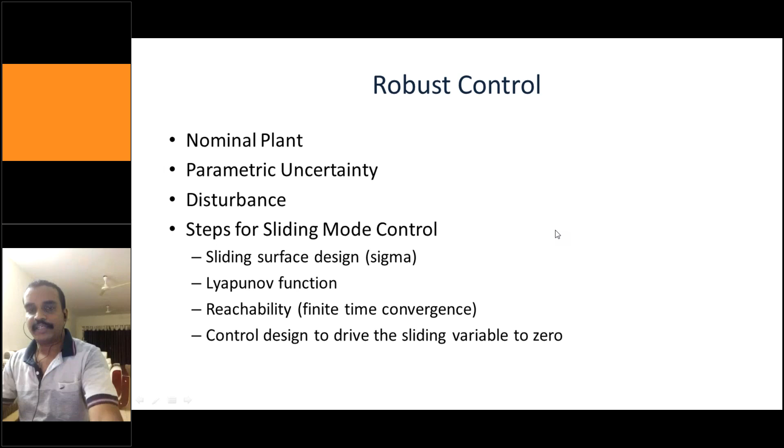So we will ask ourselves the fundamental question why variable structure control is required, because sliding mode control is one such technique in variable structure control. If you have heard of the bang-bang controller, these all come under the similar category. So for variable structure control, we'll start our discussion with a simple linear system, which is called a double integrator plant. That means two integrators connected in series, one integrator is 1 by s, the other is 1 by s. If you connect those two in cascade, the corresponding system we call 1 by s square, or the double integrator plant.

Why is this plant very important?

Excuse me, sir. Yeah, Patnaik? This resound. Yeah. Resound means somebody is not on mute. That's why the resound is coming. Is it okay now, Patnaik? Yes, sir. Okay, but if any one of you is not on mute, it will create the resound and it will be a disturbance to everyone. So that's why I am asking everyone to please be on mute.

Okay. So why is this double integrator so important for practical applications or any control system design? The beauty of this double integrator, if you see, 1 by s square: there are two poles at the origin. That means the system is an unstable system.

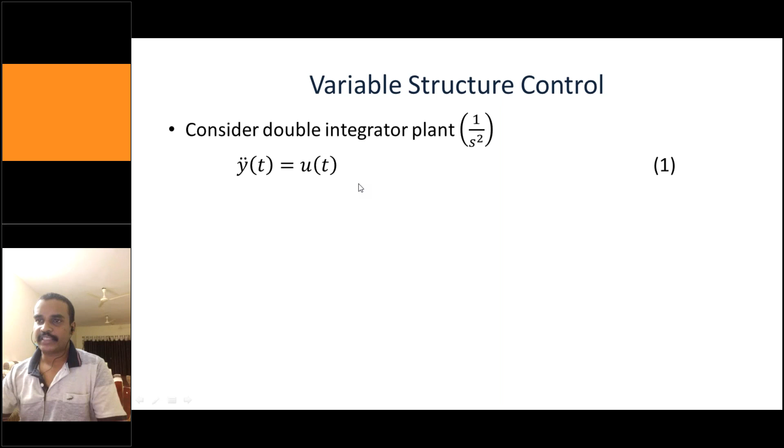Is my voice clear? Can you please type in the chat box? Some resound is coming, sir. Patnaik, is it? I think only for you. For others, Dandis, Sirisha, Kusma, I think it is fine. I think Patnaik, this is a problem from your side.

Please rectify it. Okay. So the initial feedback control law. Sir, please put it on mute. Satish Naidu. Yeah. Half of my time is going.

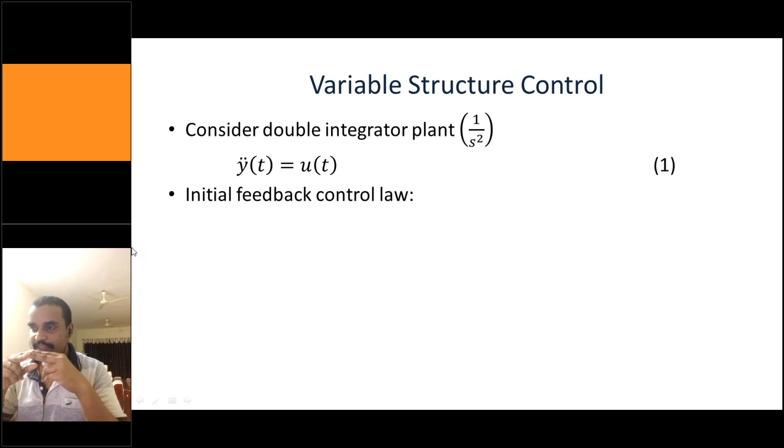Okay, so I will start with the linear initial feedback control law. The two such feedback control laws we have discussed in earlier lectures are the pole placement controller and the LQR controller. You can design using any of these methods, either pole placement or LQR.

U equal to minus kx, that's what we have seen. If you see this double integrator, there are two states. So my control law, I can write it as the feedback law. This is not exactly the state feedback law, this is the feedback law: u of t equal to minus k into x.

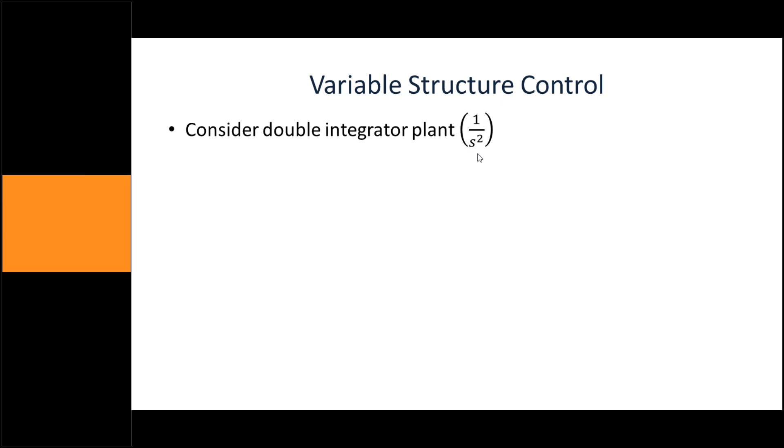Okay, so consider the double integrator plant 1 by s square, and this is linear. This is the structure: y double dot equal to u of t. Why do we say it is a linear double integrator? Because if I take the Laplace transform on both sides with zero initial condition, this will become s square into y of s equal to u of s. If I bring s square to the other side, that will become 1 by s square.

So the initial feedback control law I'm going to show you here is u equal to minus k into y. This is the piece, and we will see that this is not sufficient to...

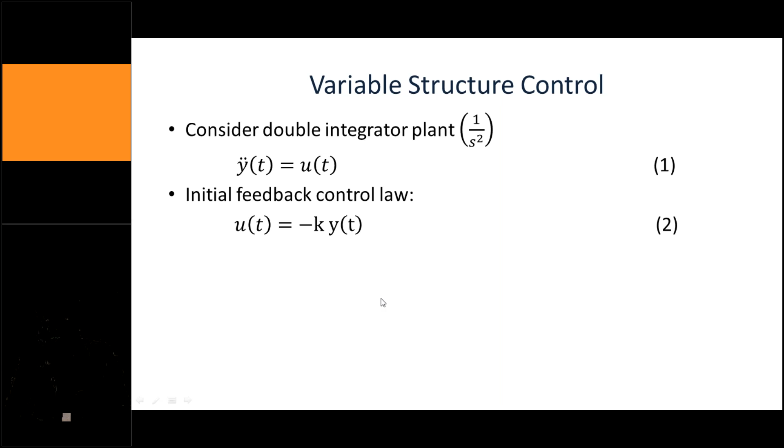We'll assume that k is strictly positive for stability. If k is negative, then u of t will become k into y, which means you'll be placing the pole on the right half of the S plane, which is not required. So for the left half of the S plane, ensure that k is strictly positive.

By pre-multiplying equation 1 and rearranging, we get y dot square plus ky square equal to c. This is quite straightforward. You can do it on your own. Just pre-multiply, and if you rearrange, you'll be getting this.

What are the properties of this? This is quite familiar if you consider k equal to 1, it represents the equation of a circle with the radius square root of c. If I assume k equal to 1 and then change this k value, the circle might change to an ellipse, and so on.

So for various values of k, we'll get different responses. We'll be considering two cases. In one case, we'll keep k in between 0 and 1. And in another case, we'll take k greater than 1. So two different cases, and we'll see what is going to happen.

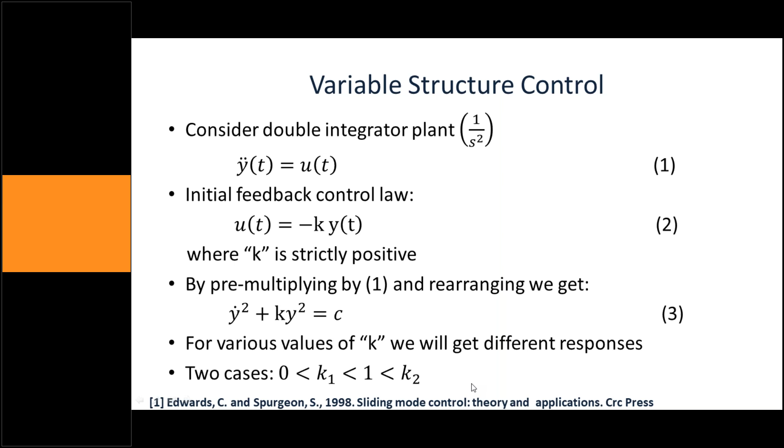I will repeat this for a minute. This is a double integrator plant, and u of t equal to minus ky of t is my initial feedback controller. If I rearrange, I'll be getting the equation of a circle with square root of c as the radius of the circle. For various k values, we'll be getting different responses. So this is one such thing.

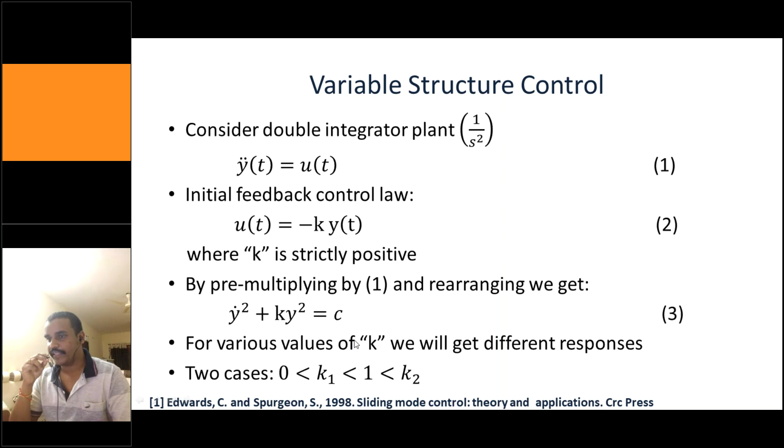The first and second case are with the linear control law. In the first case, we are going to use k1 for the value of k between 0 and 1. In the second case, we are going to use the same control law with k2 greater than 1. In the third case, we are going to use what is called a variable structure controller. The structure of the control itself changes based upon y into y dot.

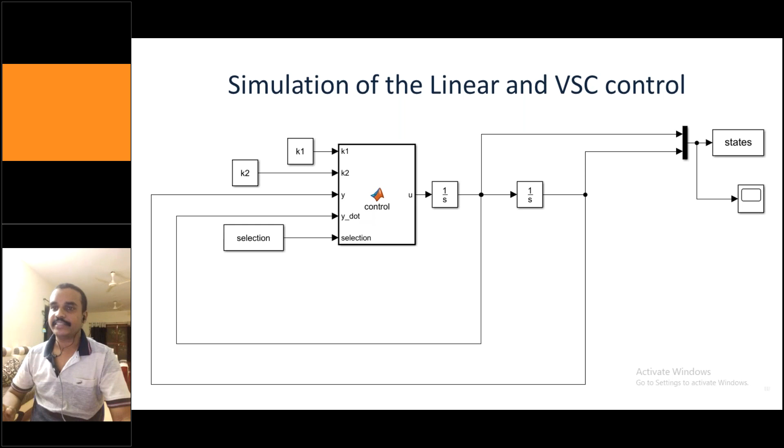The first case is if you are using a very old version of MATLAB, then you have to replace this SLX with MDL files. I'll be giving you the MDL files as well. So just type MDL here and MDL here. If you're using the newer version, you type SLX, or otherwise the old MDL file can run in your newer MATLAB versions as well.

The second thing is, if this prompt doesn't work, just comment out this prompt, remove this input prompt, and you can just type 1 here, 2 here, 3 here. So if you run this code in the normal case, it will prompt you to enter 1. If you're entering 1, it will directly give you the plots. So this is the second part of the code. What you have to do is append this figure here in the bottom, so it will look like a very big code. You have to append this figure.

So if you run this parameter code, automatically you will get all the results based upon selecting 1, 2, and 3. So now I will give you the skeleton code. How the skeleton code will look like, I will show you now, and you have to do that one. But how to run this one, I am going to show. So I am running the SMC code for the double integrator.

The first thing is you have to create a parameter file. So this is the parameter file. Whatever code I have given there, you just copy and paste, create one new M file, copy and save with whatever name you want. But don't save with characters which MATLAB won't allow you to save.

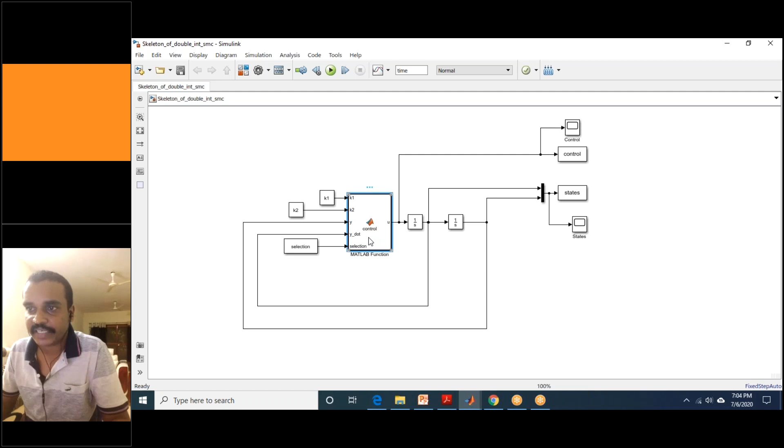You can see that this fill is the one. So in this fill, you have to copy and paste the control code that I'm going to give you now. So this is the parameter code, and this is the control block code. And I'll be giving you 15 minutes at 7:20. I'll be sending you this in a minute. So I'll be giving you 15 minutes. So please develop the code. Just copy and paste, nothing more.

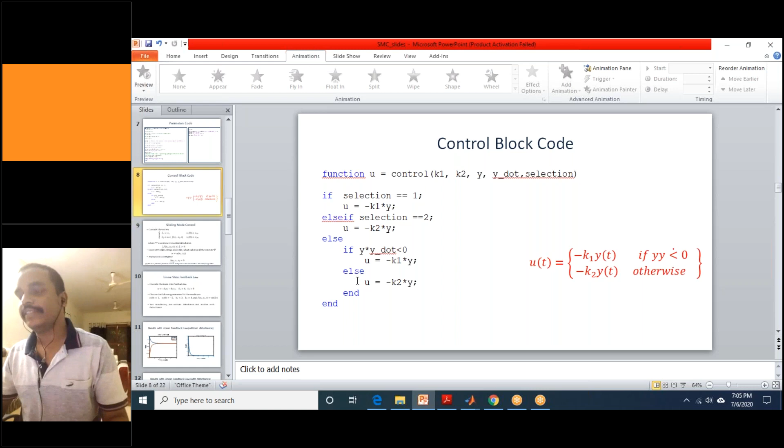Since you already have some expertise, I've already sent you the revision of FDP 1.0, and on the second, and yesterday also you might have done something. So just copy this control block code into that one and see whether you are getting the results or not. As soon as you get the result, please post in the chat box or the WhatsApp chat that you got the result. So I'll give you 15 minutes to do this tiny task, and that's it from my side. I will be sending the files in a couple of minutes to you.

You will receive them in another couple of minutes. The password will be the same for all my PDF files. Bharani GMRIT is the one. So I'm just converting the code for the 2011 version so that it will be helpful for you.

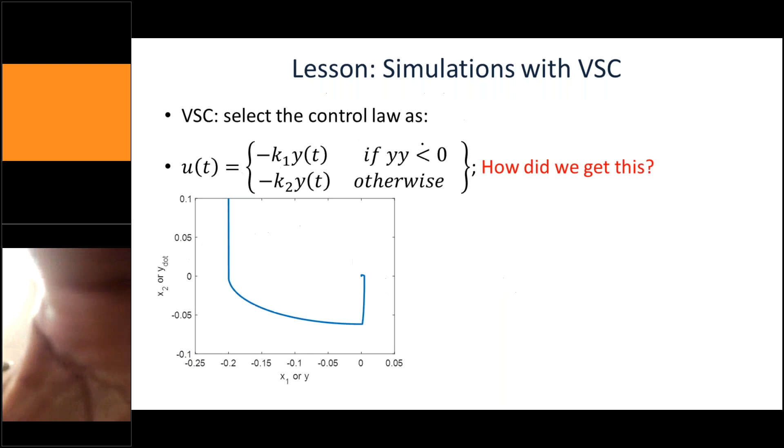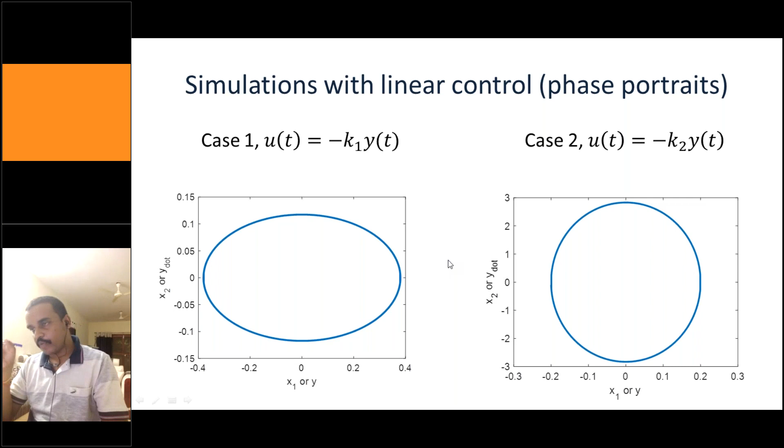So the good thing about this is, individually, from the initial condition, neither is going to the origin. When I combine both of them together, you can see that it is going to the origin. From any initial condition, you can drive it to the origin. You can check with different initial conditions and see whether you are getting the same response or not. That is not the case with the linear feedback controller. So this is the variable structure.

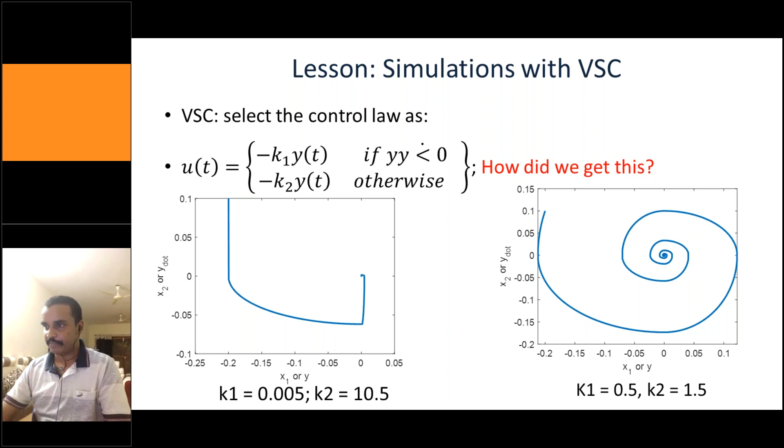This is one classical example which you will see from various sliding mode experts. Christopher Edwards is an author of both texts, and fortunately I worked with him for 4 years when I was in the UK doing my postdoc, and during my PhD he was also my team member. So I was fortunate to work with him, and whatever I learned from him, I am trying to pass on to all of you so that it will be helpful.

Okay. So now we will go to the crux of the sliding mode controller. Please listen to this very carefully. If you know this fundamental very well, then I can guarantee you can replicate the same thing for very complex systems as well. Consider the system x1 dot equals x2 and x2 dot equals u plus f(x1, x2, t).

The main difference between this system and the system we discussed earlier is, and the cursor is not visible, yeah, you can see that this f is the additional disturbance, whereas earlier we had initial conditions like 0.1 and minus 0.2. U is the controller. This looks the same as the earlier problem. The only difference is this f(x1, x2, t).

So this is an unknown disturbance which you don't know, and we will see how your sliding mode control design will have impact to suppress this disturbance. The only thing you should know while designing the sliding mode controller is the magnitude, or the bound, of the unknown bounded disturbance. So the maximum value of this f should be known to you a priori.

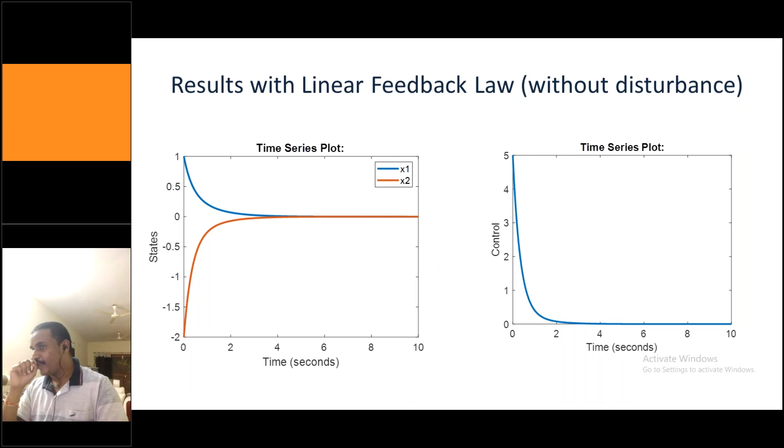So what is the lesson? What we can learn from this one is that your nominal linear control law has a capability to deal with nominal systems, without disturbances. As soon as you see the disturbance, the good results we have seen without disturbance are lost. So this motivates us to go to the sliding mode control design.

So what is a sliding mode control? These are some of the preliminary things I'll be discussing with you. Consider the desired compensated system. Again, I'll be discussing the same system: x1 dot equal to x2 and x2 dot equal to u plus f of x1, x2, t. So consider the desired compensated system.

This is my desired system dynamics. Obviously this is x1 dot equal to x2, what we have seen there. So inherently it has captured both the x1 and x2 dynamics here. Plus c into x1. As long as this c is positive, if this goes to the other side, it will become minus c into x1. That will always ensure that x1 will have the pole on the left half of the plane.

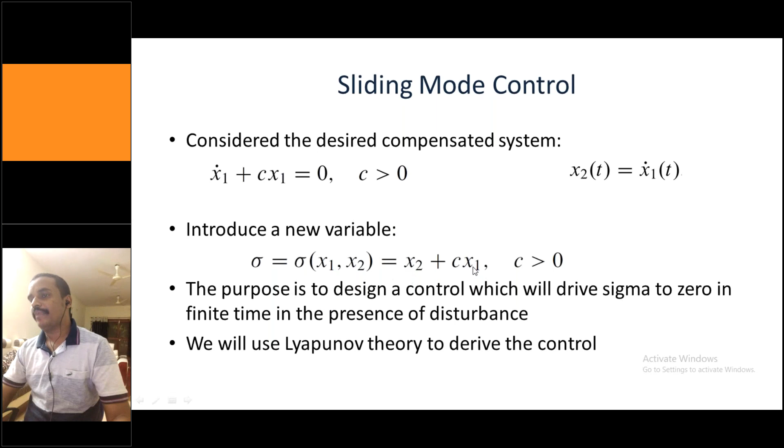Again, if you see here, what is sigma dot? Sigma is defined here like this. If I take the derivative of this sigma, sigma dot is nothing but x2 dot plus c into x1 dot. Remember this - if I take the derivative, x2 dot plus c into x1 dot, c is constant, and x1 dot is nothing but x2. So that's what's going to happen: c into x2. And again, if I substitute the x2 dot formula, which is nothing but u plus f, it will look like this. You have to take pen and paper and do it manually, then only you will get the feel of this.

Now I am assuming that my u - this u is in my control. What I'm going to assume is u equal to minus c into x plus v. And if I substitute this u here, then I'll get V dot something like this: sigma into f of x - sorry, this should be x2. The x2 terms will get cancelled, and this v will be here.

Now the purpose is, how should I select this v? If I select v equal to minus rho into sigma, sine of sigma - or this is the signum function of sigma. Where am I getting sigma from? We have seen the equation, and this rho should satisfy this relation. What is this L? L is the bound on the uncertain bounds. This L, as I told, should be known to us, and this alpha is the finite time convergence parameter. So L should be known a priori, and alpha can be a tunable parameter. Based upon this alpha, you can find out the rate of convergence, the convergence rate. And this root 2 is coming from that particular aspect only.

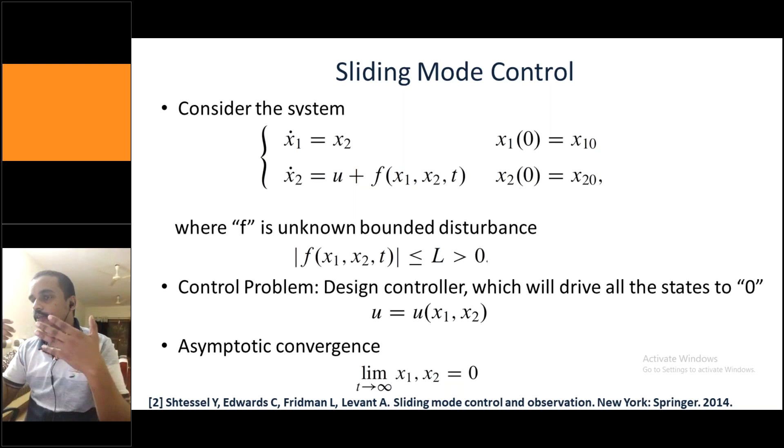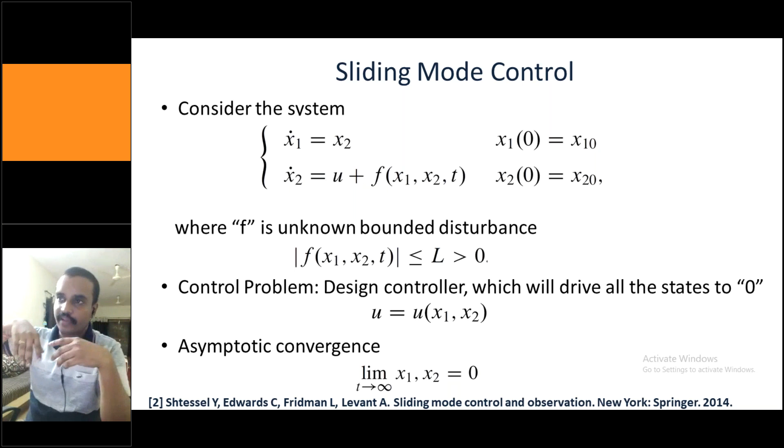If it is current, suppose you are operating some boost converter, the two states are voltage and current. If the output current in the nominal case is 1 amp, due to some external parameters and disturbance acting on your system, the current can maximum go to 1.5 or so. So the maximum value you should know, that L tells about the bound. That is the physical implication.

So this V is generally, if you see, my sliding mode control is a combination of linear as well as nonlinear. This V is a nonlinear term, and this particular term is a linear control law. So this is a combination of linear as well as nonlinear.

And this minus rho into sigma, sine of sigma, this is the signum function. This rho can be given by L, what I discussed, and alpha is the convergence state, the finite convergence state we have seen here. This alpha is coming from here. So L should be known a priori, and alpha is a tunable parameter.

So now one can ask, what is the sine or signum function? The sine or signum function will look something like this. Let us assume x is my time, or some variable. If x is less than 0, my output will be -1. When x is greater than 0, my output will be 1. And when x equals 0, my output is 0.

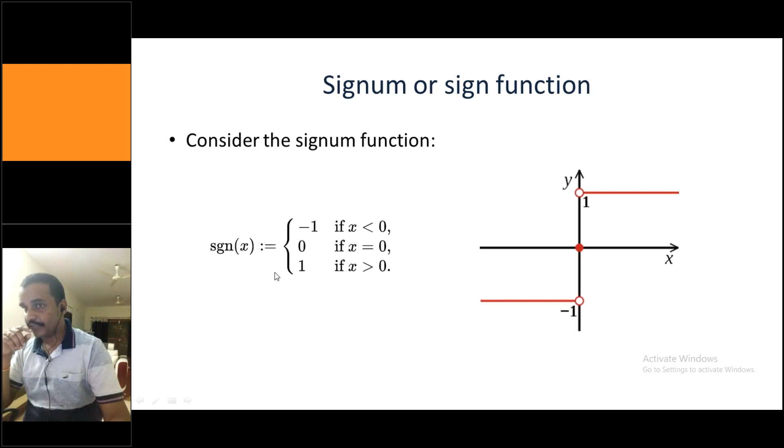So you can see that for the positive values of x, the y is always positive. And for the negative values of x, when x is less than 0, it is -1. And when x equals 0, it is 0. So this is called the signum function, and the MATLAB command sign of x will give you the signum function.

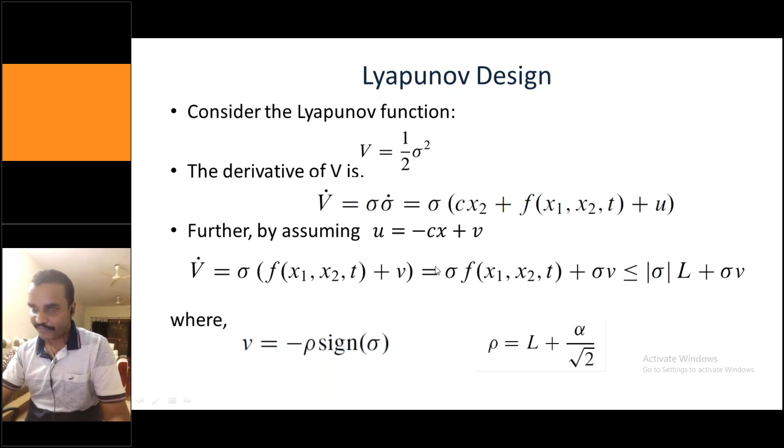So this tells about the sliding mode control law. So this V is my sliding mode control law. Now I will formally define the definitions of the sliding mode variables. So this is the sliding mode controller, forgive me for this typo here, the x2 should come.

So that's what you can see, that u equals minus c into x2 minus rho into this one. This sliding variable, what we have discussed till now in sliding mode literature, is called the sliding variable, and this sigma is called the sliding surface, or sliding manifold sometimes. Sometimes the sliding manifolds can be multi-dimensional as well, instead of sigma you can have surfaces.

The sliding surface, sigma, can be a vector as well. The condition we call sigma into sigma dot is the reachability condition. For the reachability condition, this should satisfy: minus alpha by root 2 into modulus of sigma. So that is called the reachability condition, and this is the final control law.

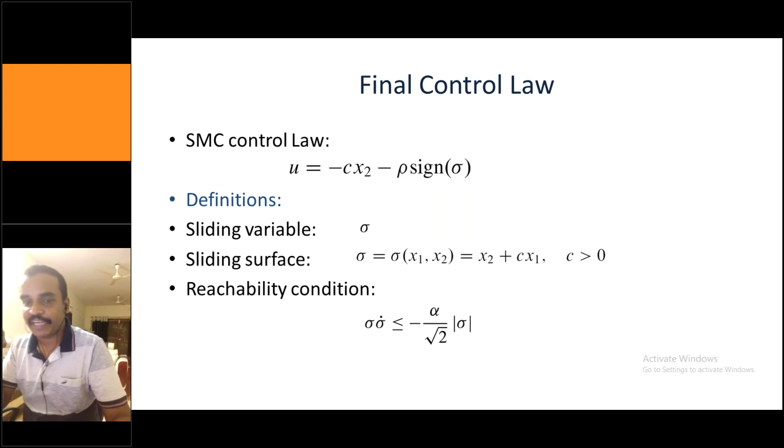Now I am going to implement this final control law using the linear feedback method and the nonlinear method, and then I will see how my response will look like. So this is the block diagram, this is the simulation diagram.

Again, I will be giving you the skeleton. The first thing is, what is this plant. Only two things you should know: this is the plant and this is the control law. And I have kept a switch here for switching action. If I want to see the response with respect to disturbance, I will activate the switch. If I want to keep the switch at 0,

Sir, can you please zoom a little bit, sir? Zoom a little bit, okay. Yeah, sir, thank you sir. Okay.

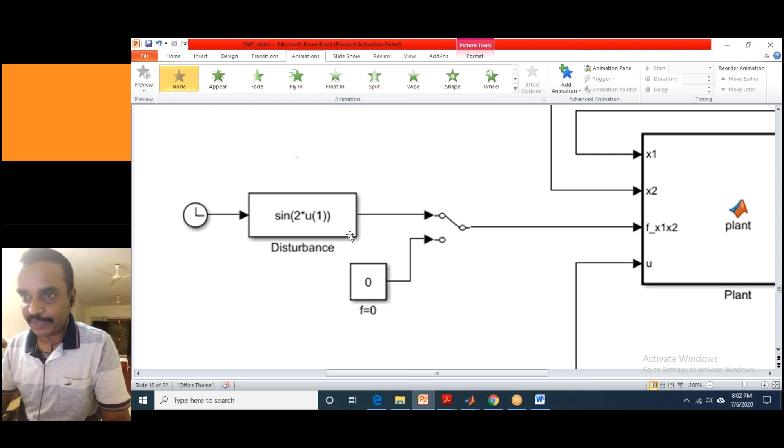You can see there is a switch here. This is a manual switch, I have not written any fancy coding. If I want to see the response with respect to the disturbance, I will activate this switch. If I want to activate to 0, if you double click, your switch will be activated. So this is to see your response in the presence of disturbance or the absence of disturbance.

So the next thing is, this is the plant. Four inputs, two are the states, one is the disturbance, and the other one is the control law. This is again my second order system. I will show you what is inside this plant and other things. And this is my control law.

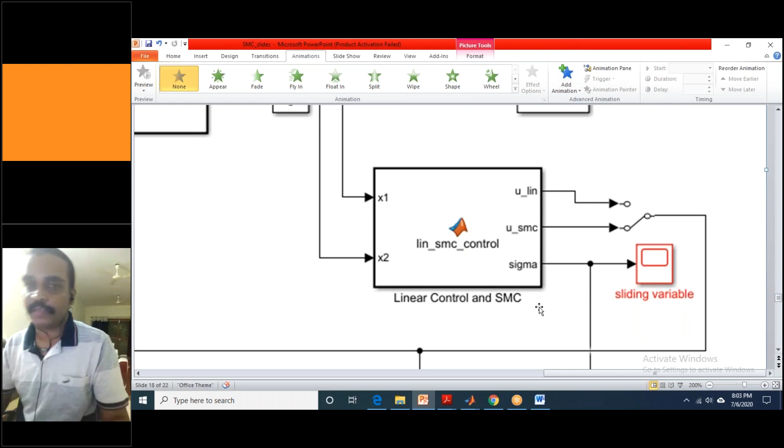I have written a single MATLAB code, a single Simulink file. This is one way of doing the coding. There are hundreds of ways, or there may be a better way of writing the code itself, but I feel that for you, this is the simplest way to do the coding.

And here there is one more switch. There are two control laws going: the linear control law and the sliding mode control law. If you want to see your response with respect to the linear control law, double click this one and it will be connected to the linear control law. If you want to see the response with respect to the sliding mode controller, double click, and the sliding mode controller will be activated.

So this is oh, something has happened, okay.

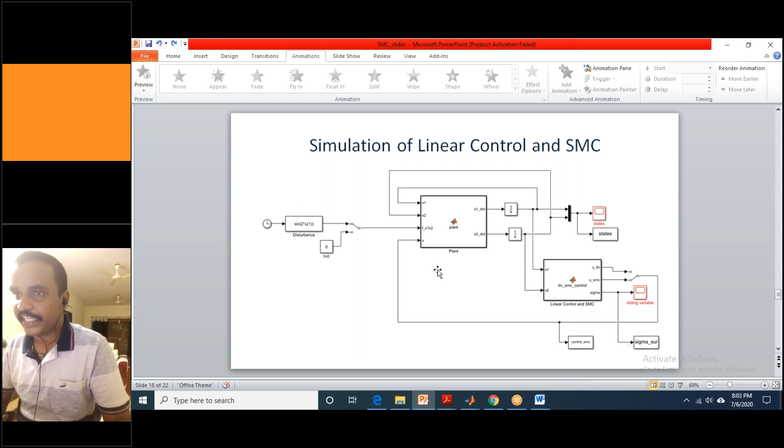So this is basically the simulation of linear controllers. I think this block diagram is quite clear. Now I will show you what is inside this. Let me go to full screen mode.

What will be inside this, how to do the coding. If you see the plant block, we have seen 4 different inputs: one is x1, next one is x2, then the disturbance, and u. And this is the standard. If you see, these are the equations: x1 dot equal to x2, and x2 dot equal to this. Don't type this complex equation in the plant block, this is just for your understanding. I have typed it here so what you have to do is just copy and paste the 3 lines.

This is for your understanding: x1 dot equal to x2, and x2 dot equal to u plus function. So this x1 dot, I have represented as x1 underscore dot, which is x2. X2 dot equal to u plus f underscore x1 x2. That is the way to write the code, you can write it in any way, this is just one such way. So this is my plant block, and the plant is very much clear.

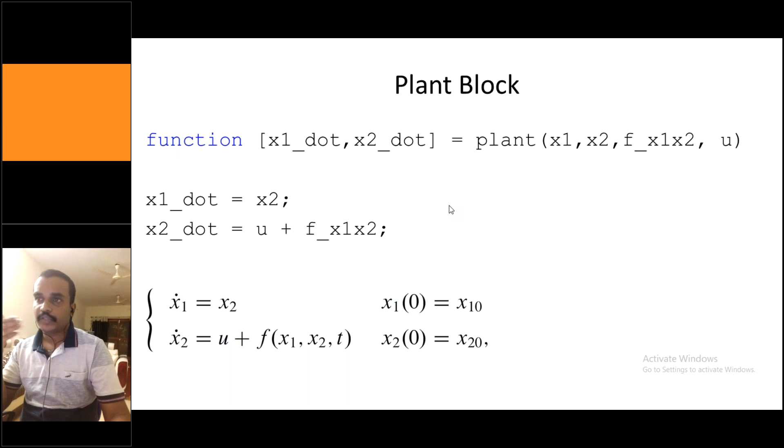Now I will go to the control block and explain how to write the controller. The important thing to see here is there are 2 different inputs and 3 different outputs. For designing the controller, I need 2 different inputs, x1 and x2.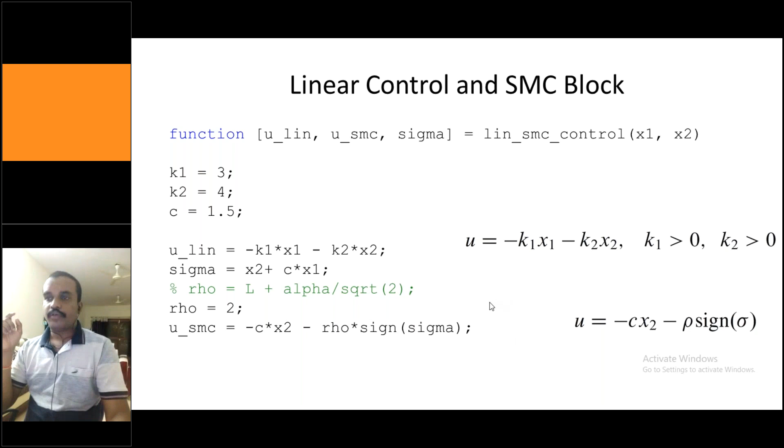And this is my sliding mode control, u equal to minus c into x2 minus rho into sign of sigma. So that's it, minus c into x2 minus rho into sign of sigma. So this is the way to write the linear SMC code as well.

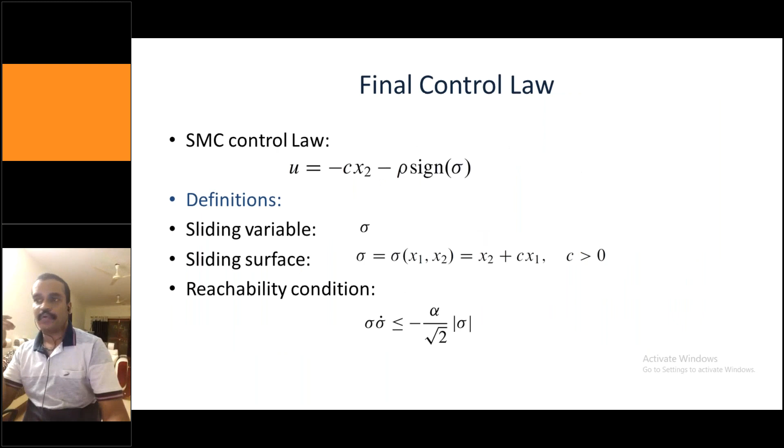And how to avoid the chattering? There are many ways to avoid the chattering. One such way is by using the higher order sliding mode control law. Another way is to approximate the sign function with a sigmoid function. There are another 4 or 5 ways which are beyond the scope of this presentation.

Sir, sorry, you are telling that chattering is high frequency. What is the range of that frequency, in kilohertz or megahertz? Is it just the clock frequency? Sir, please listen.

That depends upon the kind of control you are designing. In general, for practical systems, for any aerospace system or any power system, that depends upon the switching frequency of the whole system you are using. That depends upon the switching frequency of your IGBTs, if you are operating with IGBTs or any power electronic devices.

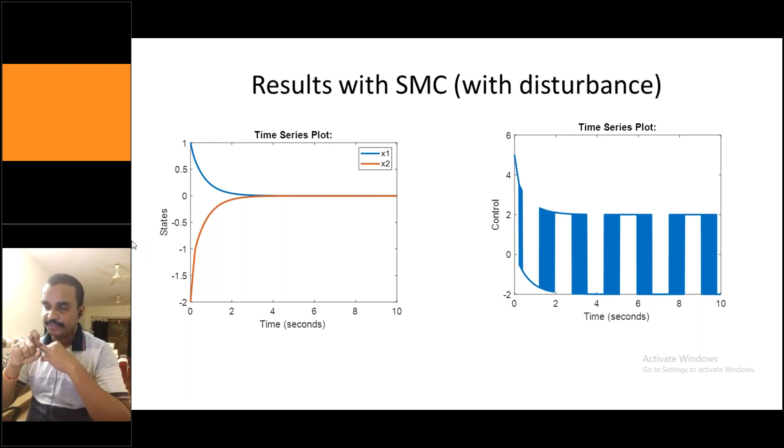So you have to run 4 different cases. One, activate the linear controller. In the first case, assume that the disturbance is 0. In the second case, assume that the sinusoid disturbance is activated. Then go with the SMC and repeat the 2 cases, one without disturbance and the other one with disturbance.

So now what I'm going to do here is show you the simulation. These simulations I have written in a bit different way compared to the previous one, just to give you the flavor of 2 different ways of coding things. First of all, here there are no parameter files. There will be one plotting file, which I will give you. This plot file you have to use once you run the simulation.

Okay, so I'll be opening the simulation file. I will give you the skeleton one. If I double click, since this is the skeleton file, you don't have the x1 dot and x2 dot. This you have to fill. And the other one is the control file I'll be giving you. This is empty. Here you have to type whatever code I have given to you.

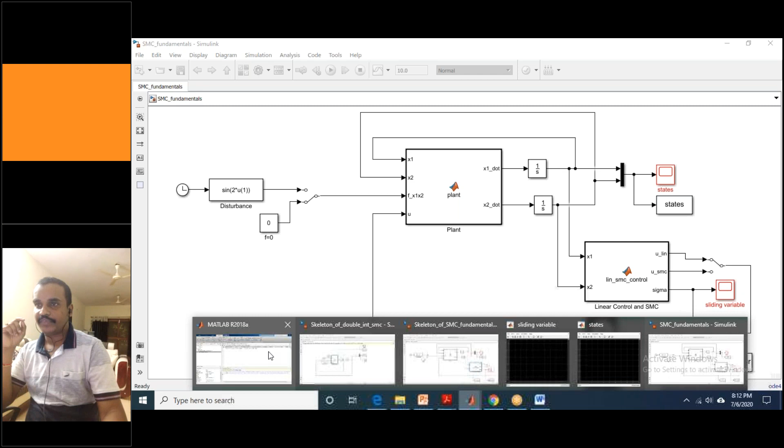For the 4 cases, in the first case I have activated, you can see here, the ulin, and the 0 disturbance has been activated. That means I'm going to see the response when there is no disturbance and my control input is linear. If I simply run this, it will run if everything is fine, otherwise an error will pop out. Once the simulation is done, I will run this plots code, and this will give you two different things.

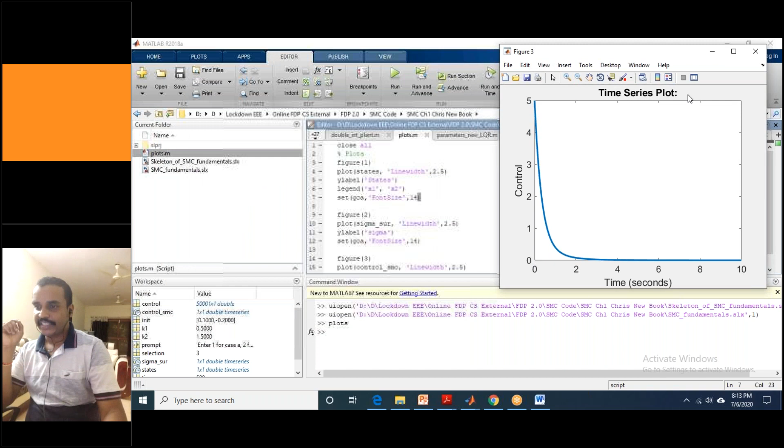So you can see here, these are the states going to 0, this is the control law, and another one is the sliding surface. As far as the linear case is concerned, there is no sliding surface required. Okay, so this is one such case. In the second case, I'm going to activate the disturbance. I will just double click this one. It has been activated. Now I'm going to run this one.

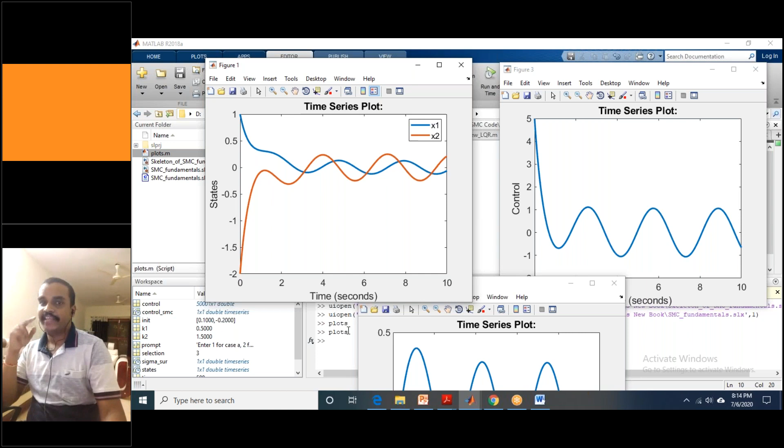Now again, I will go to the plot and plot this one. This is the sliding surface, sigma, which is not required. This is the control signal. What you can see here is my nominal controller couldn't drive my states to 0. So two sets of simulation we have done with the linear controller activated, one with 0 disturbance and another with sinusoid disturbance.

Now I'm going to operate the sliding mode control here. Sliding mode control has been activated; you can see I'm double clicking this one. Now the sliding mode control with 0 disturbance. I ran this one. You can see that it is running. Don't rush to run this one. Once it is completed, come back here and run the plots.

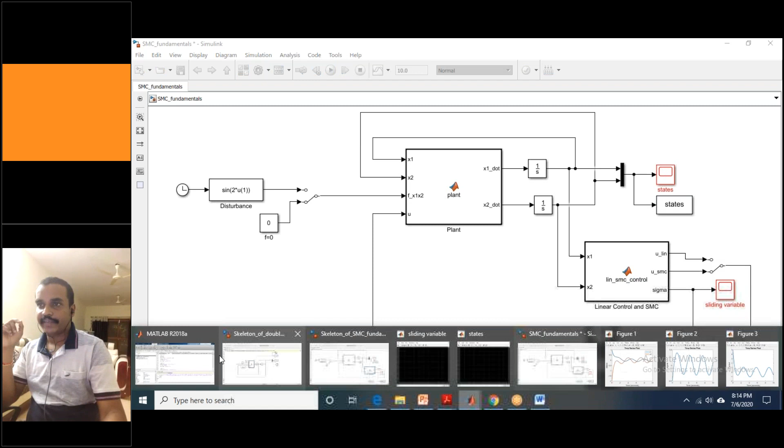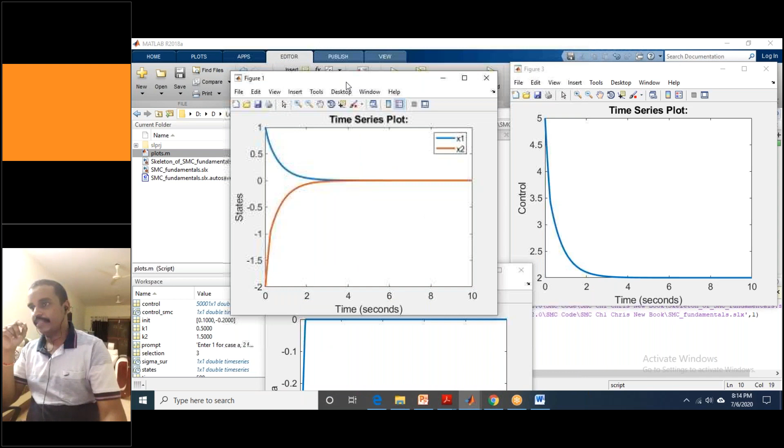You can see that without disturbance, this is the sliding mode, and it is acting like this. This is the sigma. From some initial condition, it is going to 0. This is called the reaching phase. In the sigma, you can see that up to this point there is a small jerk. Why is this happening? Because my sigma has reached 0 at this particular time, and after that it is perfectly fine. We will see the same thing for the nonlinear case as well.

This is called the reaching phase. The other one is called the sliding phase. You can see that the sigma has gone to 0 and the corresponding state has gone here, and then it has gone to 0. Now let's see the beauty of sliding mode control. I'm activating this one by double clicking. Now sliding mode is activated and the disturbance is activated. I'm going to run this one.

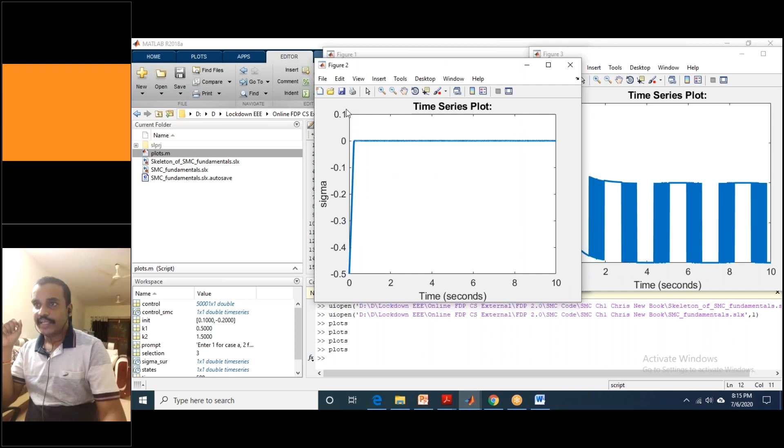And now I will run these plots. So this is the surface, and you can see that all the states have gone to 0. However, continuous chattering, this is required. So-called chattered control input is required. And this is the sliding surface, sigma.

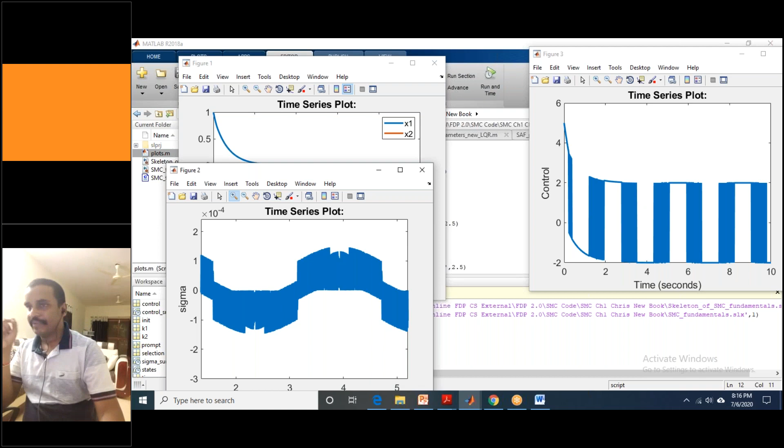If I zoom this one, you can see that the sliding surface has not exactly gone to 0. What you can see is it's on the order of 10 to the power of -4, which is quite reasonable. And if you want further reduction of this sliding surface chattering, which in turn will have impact here, there will be a trade-off. So you have to select various values of rhos and various values of alpha, what we have seen. If you keep on changing various values of rhos and alpha, then this control chattering effect can be reduced.

So that is a parametric variation study of the control parameters. If you keep on changing them, it will change the magnitude and sometimes the frequency. This frequency can be controlled by using higher order sliding mode or approximation of the signum function. So this is what you have to do.

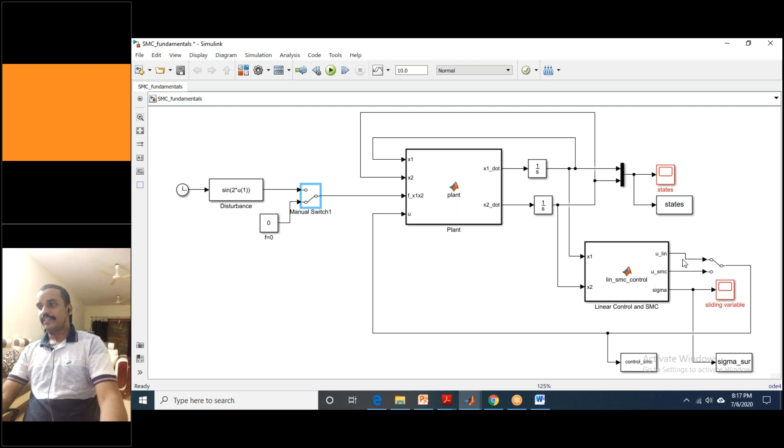Again, I'm repeating, you have to do 4 different simulations. In the first simulation, activate this linear control law and activate this 0 disturbance. Run this one and see whatever results you get. In the second case, keep this linear control law and see the response with respect to the disturbance. Then activate the sliding mode control law without disturbance, and then activate it with disturbance. Run this, and you can see the response. You can then go for the plotting side.

So I will be sending you, in the same format, 3 different files. This time I will lock the PDF. So one Simulink file, one plot file. First of all, you have to run the Simulink file and then you have to run the plot file, otherwise it's not going to work. So the Simulink skeleton file in both formats, the plotting file, and the third one is the PDF file.

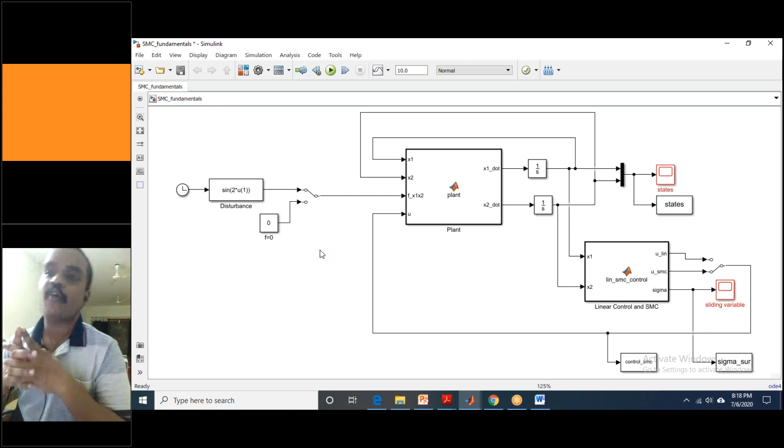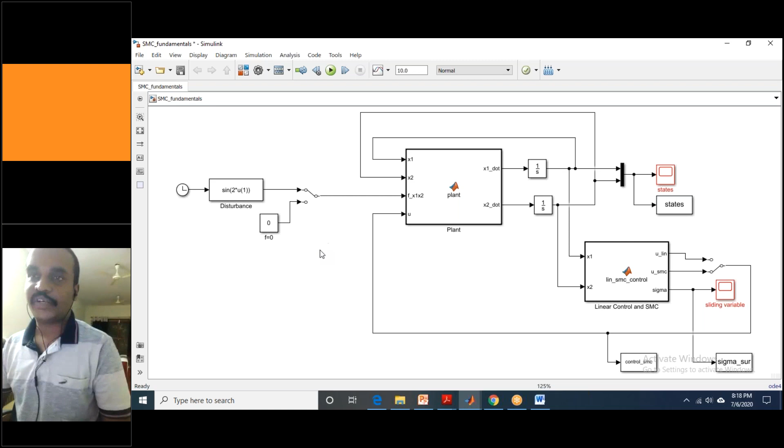And actually, some healthy discussion is going on with me. Several participants have some disagreement with me in some aspects. Some participants who are from a power systems background are very hesitant to learn this power electronics, so they were saying that this example is not clear to them, whereas vice versa, the participants who are working in power electronics are not interested.

Hello, sir, myself Dr. Ponda. I am from power systems, but I have read a little bit of control systems in my BTech. So one question: should I ask some questions to you now? Sir, please let me complete my talk. I will give the slides to the participants. They will keep on working, and during that time we can have the discussion, so that it will not bother the other participants. Just give me 5 minutes, sir. Okay, thank you.

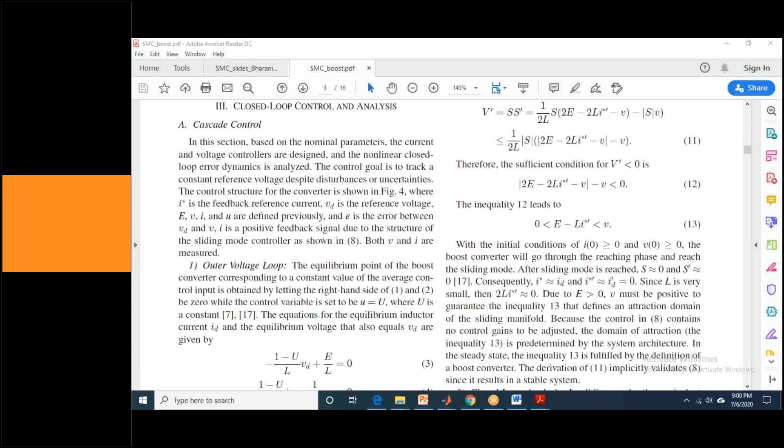Yeah. So let's share my screen. Okay, I have shared my screen to all of you. I think it should be visible. Let me see whether it is visible to you or not. Yeah, okay, good.

Today I will tell you the fundamental aspects of this paper and how to do the simulation. There is another extension of this paper. Here he has used the non-minimum phase boost converter. In another paper, an author has applied the similar concept to the Cuk converter. So let's have a discussion on this one.

The paper here is closed loop analysis and cascade control of a non-minimum phase boost converter, published in IEEE Transactions on Power Electronics, volume 26, number 4, April 2011. I will not go much into the electrical point of view. I assume that if you want to boost the input voltage, you can use a boost converter. What I'm interested in is that there are two states of this boost converter, i dot and v dot, and the remaining things, what E and L are, you can see from this paper.

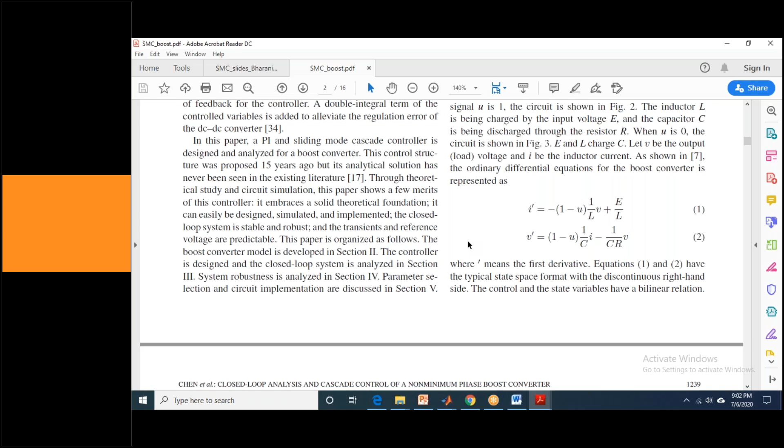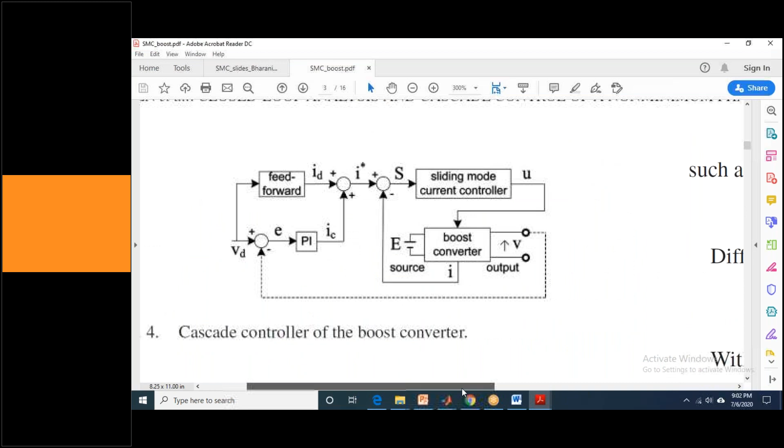So if you see this particular diagram, what I can say here is basically it is a two loop structure plant. So here you can see that the inner loop is a sliding mode controller, which is basically a current controller. And the outer loop, you can see that there is a PI controller, and in fact they have added the feed forward control as well.

So in some cases, if this feedback control doesn't work, in the absence of uncertainty, if you know your system exactly and everything exactly, then in some cases this feed forward control will work. So this is the overall structure. This is the boost converter. Two states, the current and the output voltage, and the input U from the sliding mode controller is going here. So what are the things required to simulate this plant?

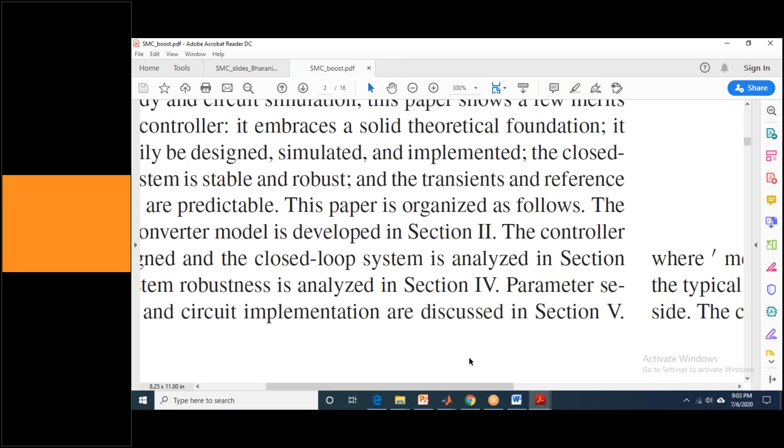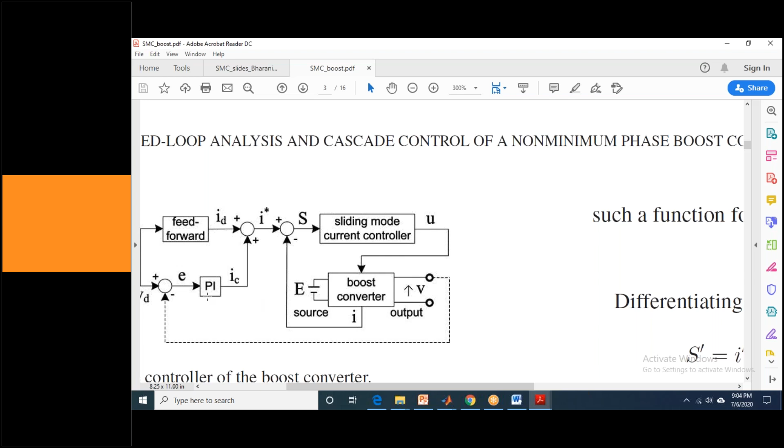The first thing required to simulate the closed loop boost converter is these two equations, and you need the sliding mode controller, you need the PI controller, and you need the feed forward controller feed forward gain. So first of all, this is in the cascade control. First of all, the outer loop control, and you can see that ID equal to VD square by RE.

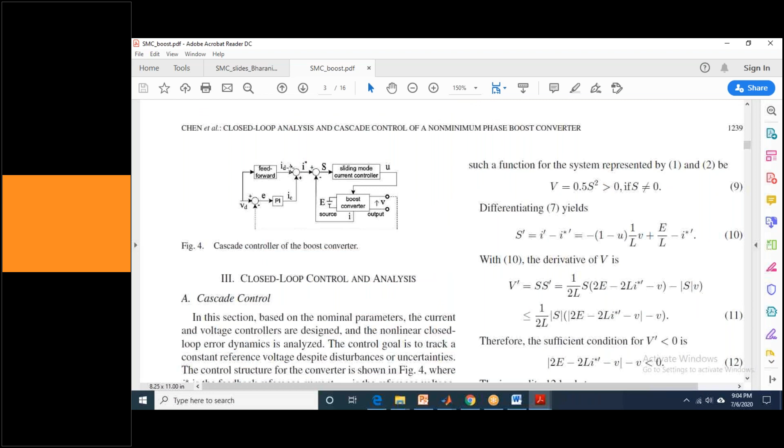If you see this I star, the reference current, how we are getting this reference current is, you can see the reference current is getting generated by ID plus IC. So ID is the feed forward current, so there is a constant gain here. You can see that VD square by RE, where R is constant, E is constant, and VD square will also be constant. So ID is a standard number, I will tell you.

And this IC, how you are getting the IC? The output voltage is compared with the reference VD voltage, and the error has been given to the PI controller, which in turn generates the IC current. So based upon this IC and this ID, we are getting the reference current. And the aim of the sliding mode controller is to ensure that the error between the reference current and the actual current should be zero.

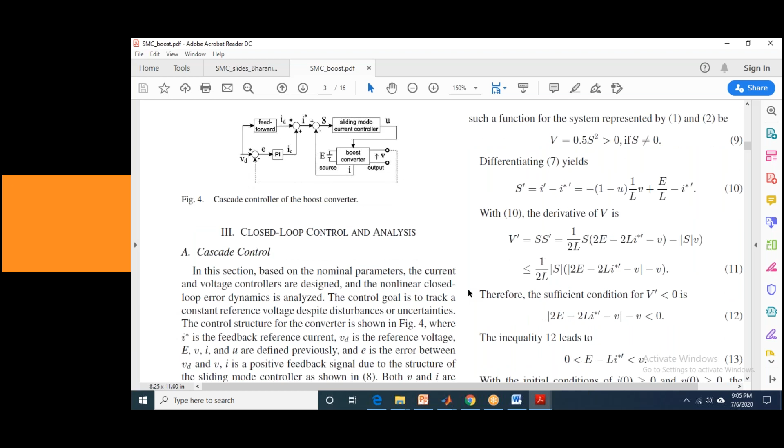So what is happening here is, if you think that there is no feed forward controller, that this ID is zero, then the output of this PI controller will become the reference control input. So this is one such thing. Okay, so we need the PI controller. PI controller means only two gains are required. The two gains are KP and KI. So this is one thing required, and this is my I star. So now I am able to get my reference current and the sliding mode current.

So as we discussed, S equal to this is a sliding surface, switching manifold. Sometimes it is called a manifold as well. I minus I star. So this is basically the error in the currents. And my boost current controller, sliding mode controller, what we discussed: if S is less than 0, then U equals something like this. If it is greater than 0, then this becomes 0. So this is the sliding mode control.

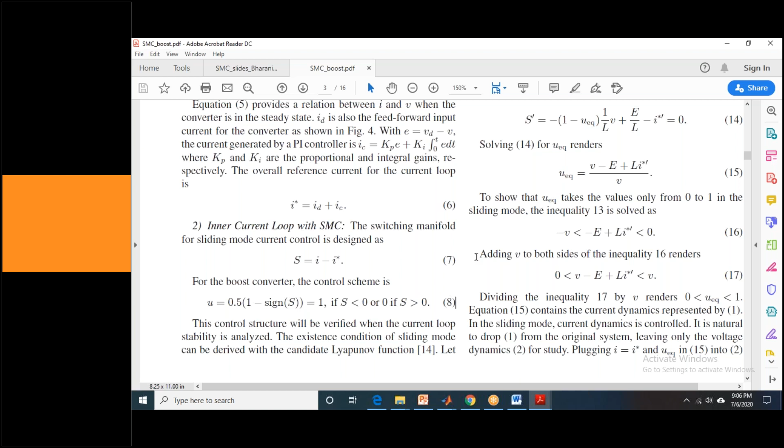This is very much similar to what we have seen in the earlier lecture in a similar format. One is the linear and other is the non-linear. The linear action is only some constant value, and this sign is non-linear. So now you have the complete information with you to do the simulation, and this is the further analysis. If you are interested, you can go through the further analysis, or it is up to you.

So the information I need is, this is the controller to do the simulations. This is one such information required. I need this PI controller, and I need this feed forward gain.

So apart from the system equations, where are all these parameters given? All these parameters are given here, and to inform you, these are all the nominal parameters.

One aspect of the sliding mode controller we've seen is disturbance rejection, but here we are going to see the effects of parametric variation or uncertainties. These are all the nominal parameters, and various simulation cases have been given - the nominal value, and Kp and Ki values given like this. Someone asked whether to consider negative Kp or Ki values - yes, it is possible, as you can see from this example, and they have done real-time implementation as well.

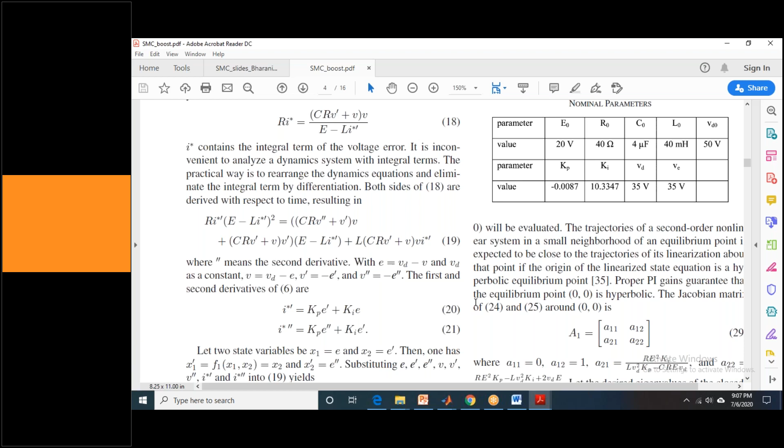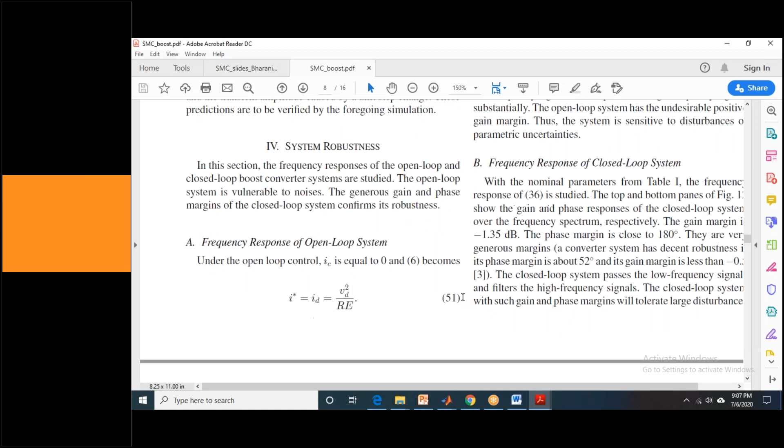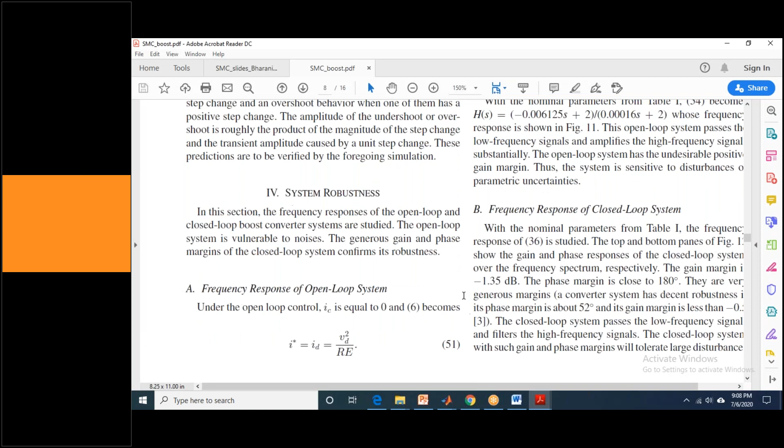I will now go to these analyses. Those who are interested can go to this one. I will show you the various analysis of what they have done here. Yeah, this is the simulation.

Now what I'm going to show you is how the simulation will look like and how it is going to work. I'm not going to share this simulation with you - you have to develop your own, but I will explain everything.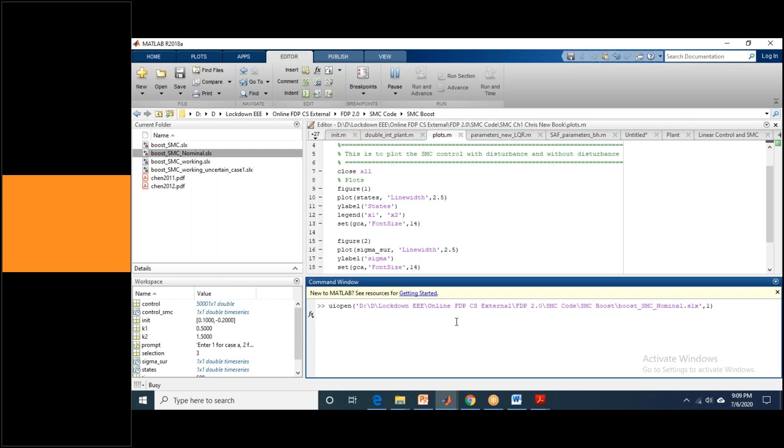So this is the structure of my boost controller. This F, the feed forward controller, you can see is U1 squared by 40 into 20. I just hard coded everything here - this is not the good way. You can write it in the parameters and that can be called here. So this is the hard coded way.

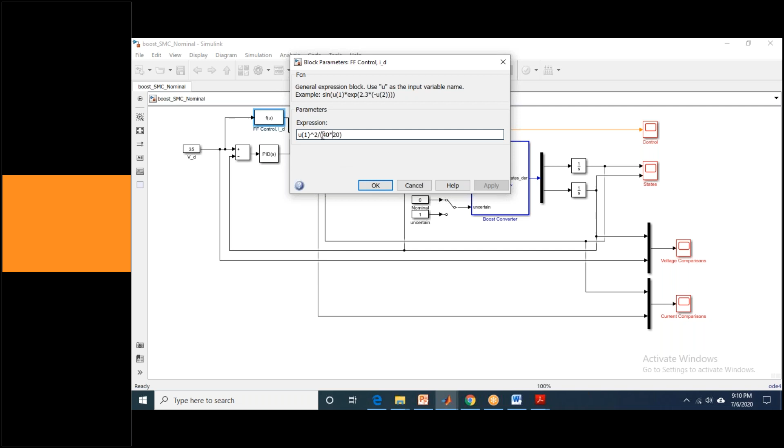This is one such set of nominal values, and these are the PI values he used, minus 0.0087, 10.3. This is only P - the derivative term is 0. These two are getting added to generate the reference current, and the actual current from here gets subtracted to generate the sliding surface. If S is greater than 0, your control should be 0, otherwise the control should be 0.5 into 1 minus sign of S. This is the control law.

And this is my boost converter. Here all the parameters, since these are nominal parameters, I have given E0, L0, C0, R0 as nominal parameters. So if uncertainty is 0, it will take the nominal parameter; otherwise it will take the uncertain parameter - 75%, 20%, 100%, and 500%. That depends on how you want to run the code.

Here you can see uncertain parameters and uncertainty - if you select one, it will take the uncertain values, otherwise it will take the certain values. I will just run this one and show you. Hopefully it will run, because I did this simulation some time back. It's compiling, and yeah, it is ready.

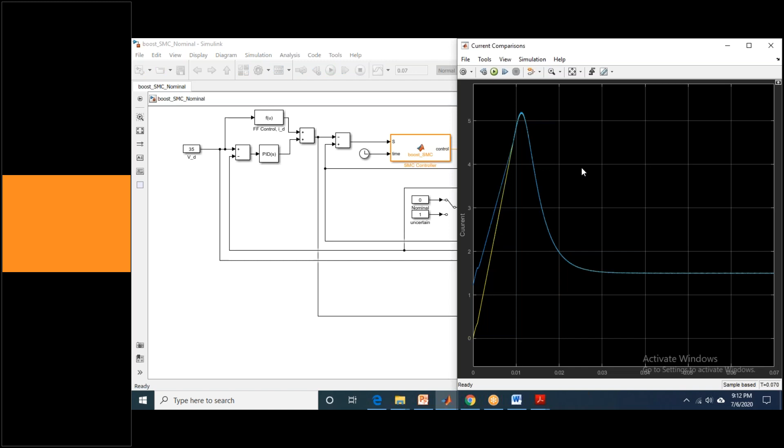Next I'm going to show you how it works in presence of uncertainties. In one such case, I ran this - now you can see uncertainty is activated here. So now I'm going to show you what happens.

This is the thing. What I did is until 0 second, this time is going inside. So as per the definition of the paper, I think until 1 millisecond there is no control, so u equals 0.

Here I have ensured that if time is less than 1 millisecond, then your control input is 0, to replicate the results of the paper.

That is the thing. You can see the voltage, and you can see how the current tracks the reference, but there is some chattering. This chattering can be avoided by using the methods I told you. And this is your control input, because this is basically the duty cycle.

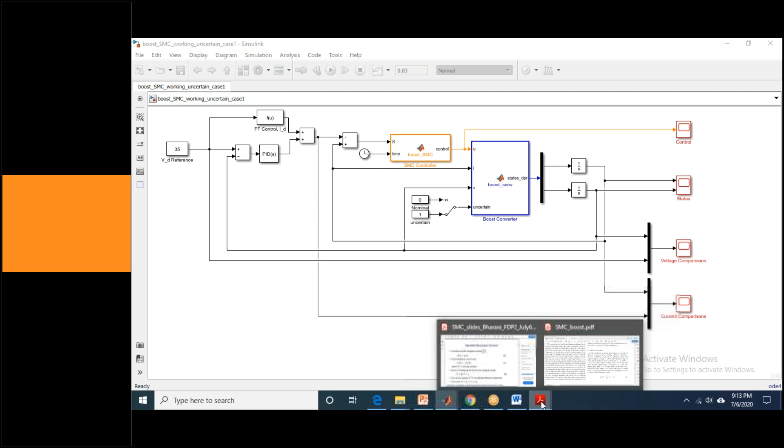You can see that it is limited between 0 and 1. This is a signum function, the fast switching action. The similar results I'm going to show you now are what they got in the paper, and what results we have obtained.

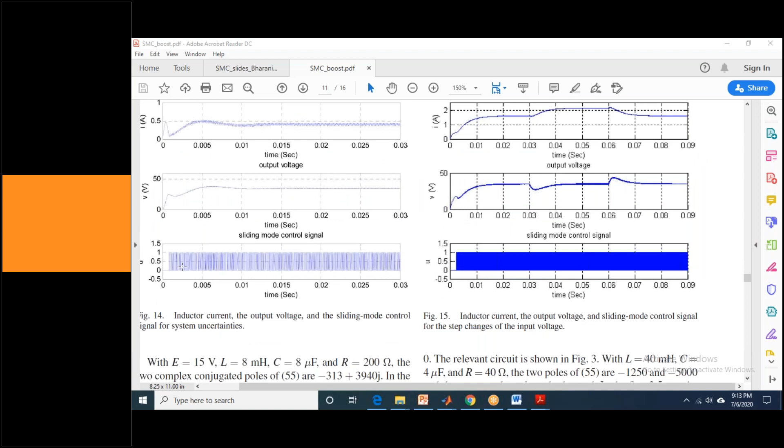This is the result for one such case. You can see the chattering here, and you can see that it is almost settling in 0.01 second, your voltage, and the current is approximately going to 0.5 and so on. So this is the first uncertainty, the system uncertainty.

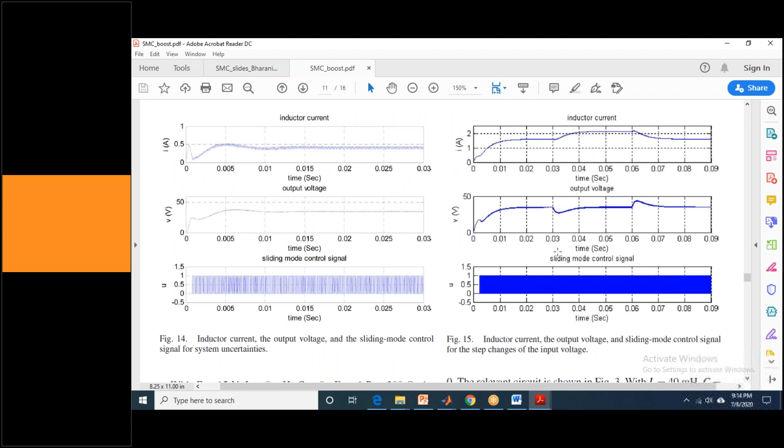They have done similar tests for various other cases as well. They changed the input source voltage with a step change and observed what happens. They changed the load resistance and observed the performance. They also applied input disturbance, and tested all other cases. So after various testing scenarios, they also did the hardware implementation.

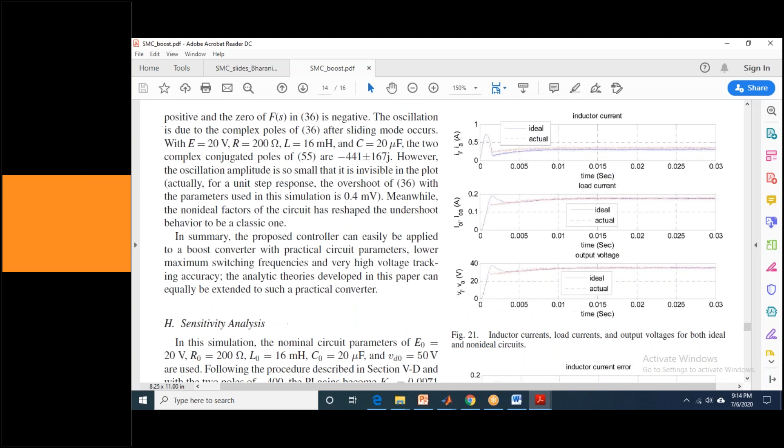So this is what we can see, and they have done the sensitivity analysis. All these tests I have done, and it is working very fine with this method.

So what I will do is share this paper with you, and I will share this screenshot as well. Now it is your job to develop this one. Everything is given, it is quite simple, so that is it from my side.

And another paper, I will show you. So those who are actively wanting to gain or extend their knowledge of what they have learned in this topic, here is another paper. Again, the structure is everything the same.

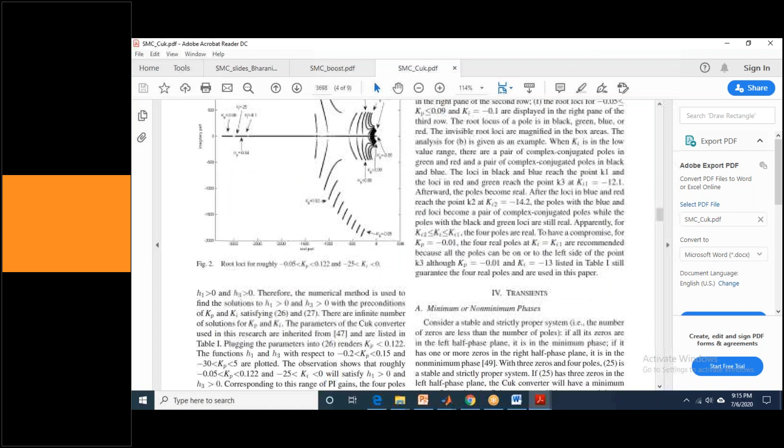Again, they have done some classical analysis, and here they have shown the simulation with only one case. The PI controller gains they have selected are 0.01 for KP and 13 for KI, negative gains, and these are the results they have shown, the transient and other results which you can easily obtain for your particular case.